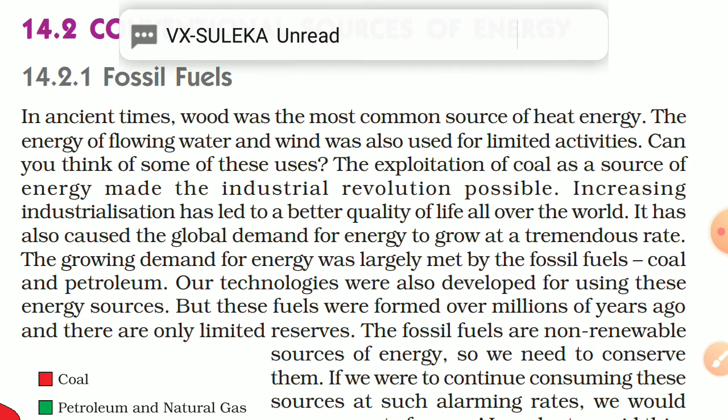It has also caused the global demand for energy to grow at a tremendous rate. Due to this increasing industrialization, people's life is becoming better. We are getting better things around us, and the growing demand for energy was largely met by the fossil fuels, coal and petroleum.

This growing demand, in earlier times, was largely completed by using coal and petroleum. Our technologies were also developed for using these energy sources, but these fuels were formed over millions of years ago.

There are only limited reserves. They take a very long time, like millions of years, to form, and we are using them at a great pace. If we compare the generation rate and the usage rate, the usage rate is much higher, so a time will come when there will be no fossil fuel left on the earth's surface.

The fossil fuels are non-renewable sources of energy, so we need to conserve them. If we continue consuming these sources at such alarming rates, we would soon run out of energy. In order to avoid this, alternate sources of energy were explored.

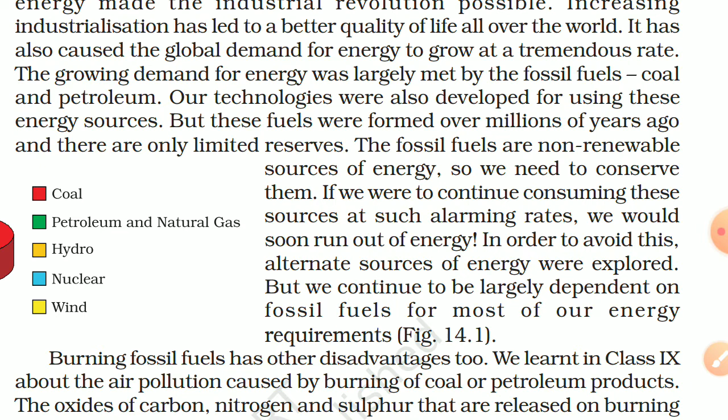Because these are very limited sources, in the near future, maybe by 2050, these fossil fuels will be completely over. At that time we will have to switch our energy demand to some renewable energy source. In order to avoid this, alternate sources of energy were explored, but we continue to be largely dependent on fossil fuels for most of our energy requirements till today.

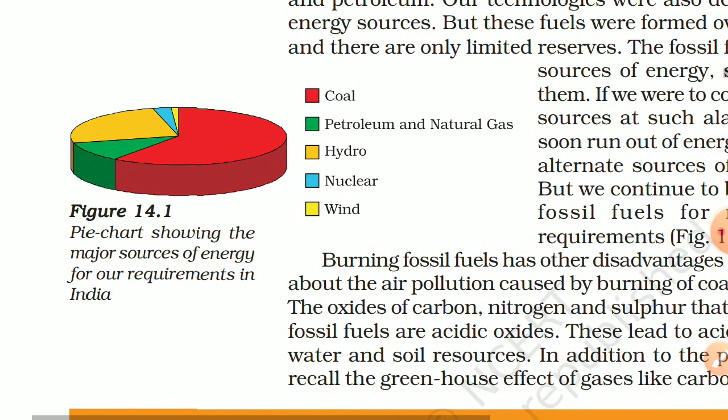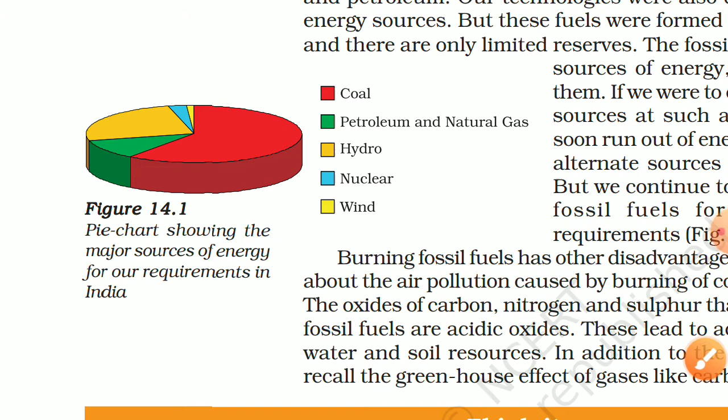As shown in this pie chart, coal is used the most, then green represents petroleum, yellow represents water energy, blue represents nuclear, and another yellow represents wind. Almost 60% of our present energy is fulfilled by coal and petroleum.

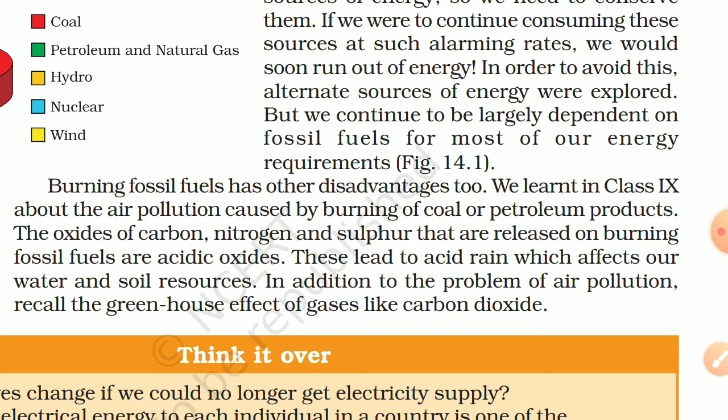Burning of fossil fuels has other disadvantages too. We learned in class 9th about the air pollution caused by burning coal or petroleum products. The oxides of carbon, nitrogen, and sulfur that are released on burning fossil fuels are acidic oxides, and these lead to acid rain which affects our water and soil resources.

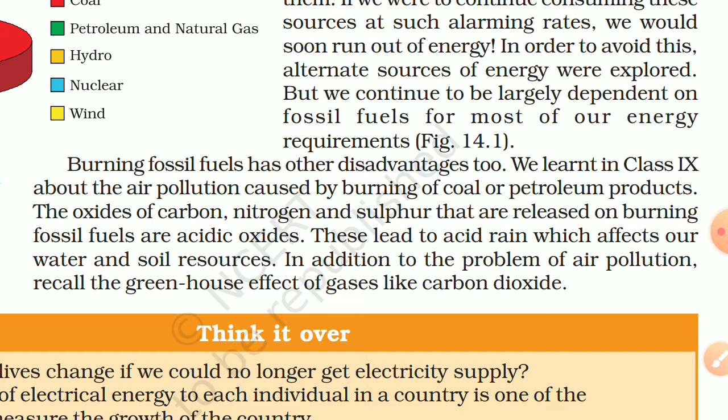In addition to air pollution, recall the greenhouse effect of gases like carbon dioxide. Coal mainly contains carbon, and when this carbon goes into the atmosphere it becomes carbon dioxide, nitrogen oxide, and sulfur oxide. These are very poisonous gases, forming acidic oxides, and ultimately causing acid rain, and they are also responsible for the greenhouse effect. The burning of fossil fuels is very harmful for our environment, and we are currently seeing its effect as air quality becomes degraded day by day.

The pollution caused by burning of fossil fuels can be somewhat reduced by increasing the efficiency of the combustion process and using various techniques to reduce the escape of harmful gases and ashes into the surroundings.

This fossil fuel emission can be reduced by research and by implementing new technologies by which we can emit very less quantity of these poisonous acidic gases. Also you can collect the harmful carbon dioxide gas which emits from your chimney. If you collect that gas and use it for other purposes, then its emission can be reduced.

Besides being used directly for various purposes in gas stoves and vehicles, do you know fossil fuels are the major fuels used for generating electricity? Yes, as you can see petrol and diesel you are using in your vehicles for transportation. But the electricity from which your air conditioner, refrigerator, television, tube light, fan, almost everything in your house runs, is generally made by burning fossil fuels.

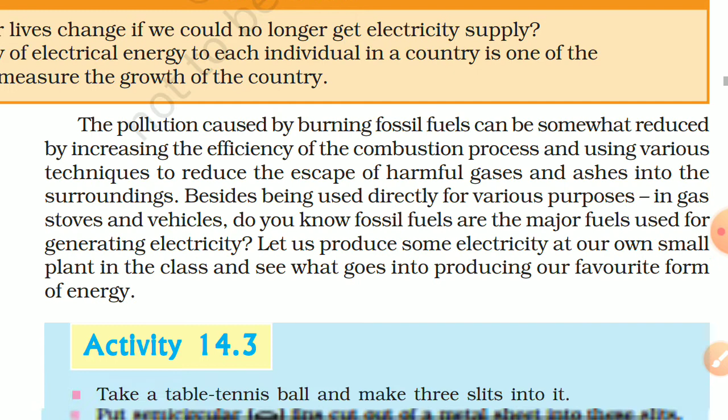So let us produce some electricity at our own small plant in the class and see what goes into producing our favorite form of energy. Let's do activity 14.3.

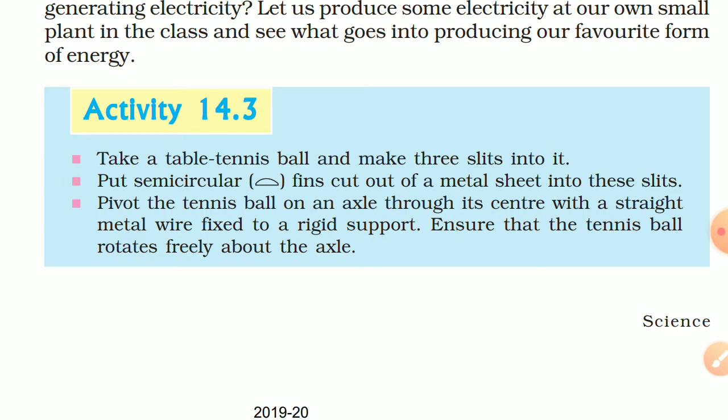Take a table tennis ball and make 3 slits into it. Put semicircular fins cut out of metal sheet into these slits. Pivot the tennis ball on an axle through its center with a straight metal wire fixed to a rigid support, ensuring the ball rotates freely about the axle. Now connect a cycle dynamo to this, and connect a bulb in series. Direct a jet of water or steam produced in a pressure cooker at the fins. What do you observe?

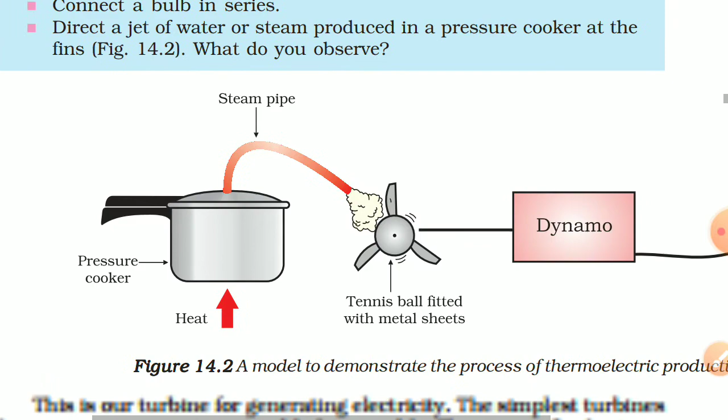In this activity I will show you how electricity is generated from fossil fuel. First of all, heat - how can we produce this heat? It is very important: coal. You have seen in villages that people burn coal to produce heat and energy, to cook food. So if you burn coal here, it will produce a large amount of heat.

This heat energy will transfer to this cooker. The cooker will create pressure. Due to this pressure, the pressurized steam will come and force this tennis ball to rotate freely. Due to the rotation, this dynamo will convert mechanical energy into electrical energy, and ultimately we will glow our bulb. So the main source of energy is this heat.

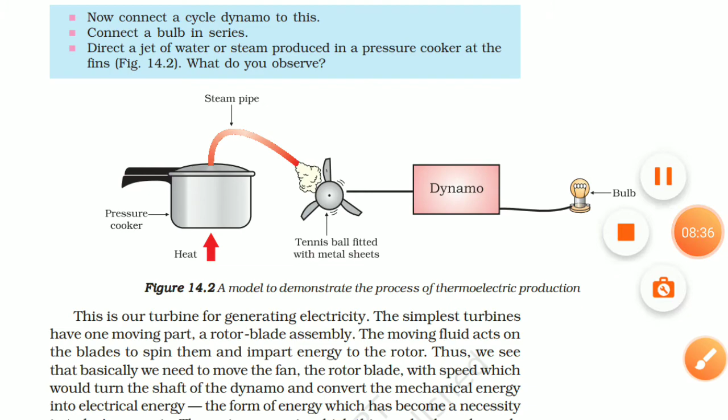And how is this heat produced? This heat is produced by using coal. Yes, so this is our turbine for generating electricity. The simplest turbines have one moving part, the rotor blade assembly. The moving fluid acts on the blades to spin them and impart energy to the rotor.

So to move this fluid you require some energy, some pressure. This pressure energy can be caused due to the burning of coal. Thus we see that basically we need to move the fan, the rotor blade, with speed which would turn the shaft of the dynamo and convert mechanical energy into electrical energy.

This form of energy has become necessary in today's scenario - electrical energy. Imagine if light goes out in your house for almost 5 to 10 minutes, then you become very frustrated. You can't live without electricity for even a few minutes nowadays.

So electrical energy is a very important form of energy, because all the appliances around us, even charging your phone or laptop for working, require electrical energy. So after charging, when your battery finishes, you have to charge your phone again. So for charging your phone you require electrical energy.

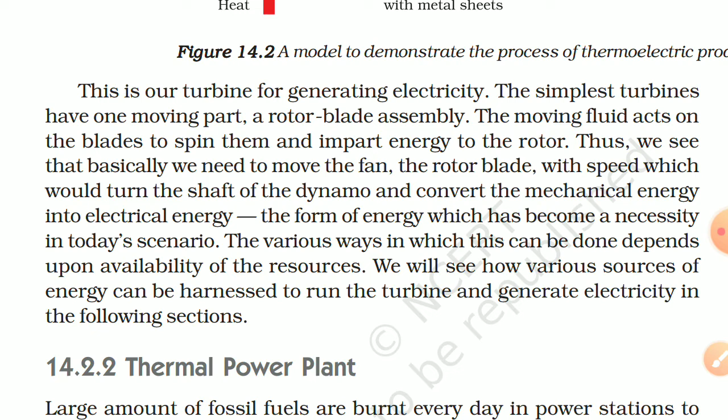This is a very important, in fact the most important, form of energy. The various ways in which this can be done depends upon availability of resources. We will see how various sources of energy can be harnessed to run the turbine and generate electricity in the following sections. Remember, the principle is to rotate this turbine. Imagine a wind power station, which has this type of fans - by rotating these fans you generate electricity.

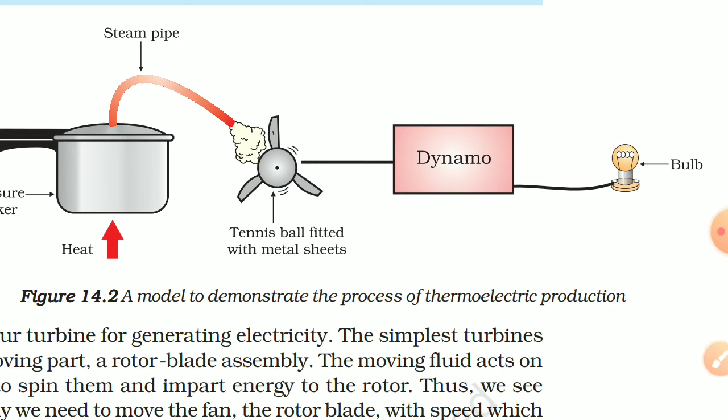So this rotation is very important, and you cannot rotate it physically. You have to require some pressurized energy to rotate it, and to generate that pressurized energy you require fossil fuels. In fact, for every type of energy, the main principle will be the same: the rotation of this turbine. So for that energy you take different types of energy.

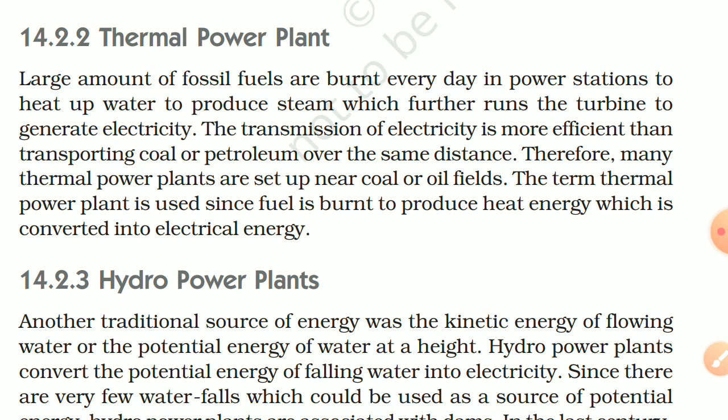First is fossil fuel, then I will discuss about thermal power plants. Large amounts of fossil fuels are burnt every day in power stations to heat up water to produce steam, which further runs the turbine to generate electricity. This steam, yes, ultimately we require this steam to rotate our turbine.

So how will we produce this steam? There are many different sources from which we can generate this steam, but after steam the path is similar. The transmission of electricity is more efficient than transporting coal or petroleum over the same distance. For example, if you find coal at Ankleshwar and have to transfer it to Ahmedabad, it is very difficult to transfer that coal directly. But if you convert it into electrical energy and transfer electricity, it will be very efficient and easy compared to transporting coal directly.

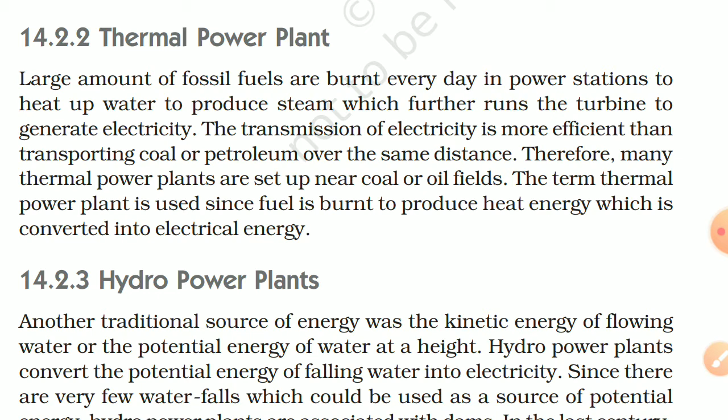Therefore, many thermal power plants are set up near coal or oil fields, so that after converting into electrical energy, we can easily transfer it to other places. But whole coal or whole oil is very dangerous and toxic to transport. The term thermal power plant is used since fuel is burned to produce heat energy, which is converted into electrical energy. So ultimately, either mechanical energy or heat energy is converted to electrical energy. Please remember this point.

Third is hydropower plants. Hydro means water. So by the pressure of water you rotate the turbine and generate electricity using a dynamo. This dynamo principle you will study in chapter 13, magnetic effect of electric current, where you will learn how the mechanical energy of rotation is converted into electrical energy. For now, just remember that it converts mechanical energy into electrical energy.

Another traditional source of energy was the kinetic energy of flowing water, or the potential energy of water at height. So imagine a dam. Many of you might have visited the Sardar Sarovar Dam, and if you have special permission to go to the downstream side, you will find 3 to 4 turbines placed inside the dam. Due to the pressure of the water force, those turbines run, and after their movement you can convert that into electrical energy.

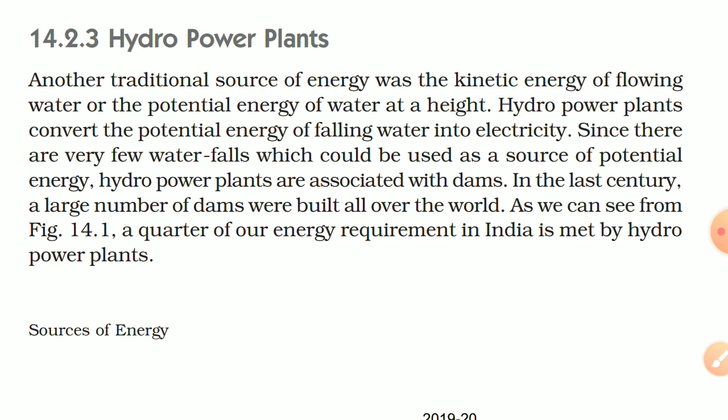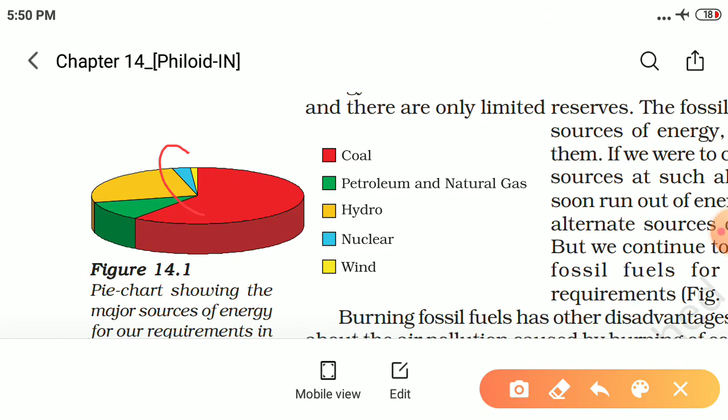Since there are very few waterfalls which could be used as a source of potential energy, hydropower plants are associated with dams. In the last century, a large number of dams were built all over the world. As we can see from figure 14.1, a quarter of our energy requirement in India is met by hydropower plants. In this pie chart you can see that a small amount of energy is produced by hydropower plants. Hydro means water.

So now we will study how we can convert water energy into electrical energy, or how we can rotate the turbine. This is the cross section of a dam, built everywhere, showing the layers. Here there is a reservoir, where water is stored. Here they make small gates, through which water flows and rotates this turbine.

So as this turbine rotates, it connects to the generator. This generator will convert the mechanical energy of the turbine's rotation into electrical energy, and ultimately this energy will be transferred by powerlines to different parts of our country. It may go to nearby cities or to different states also.

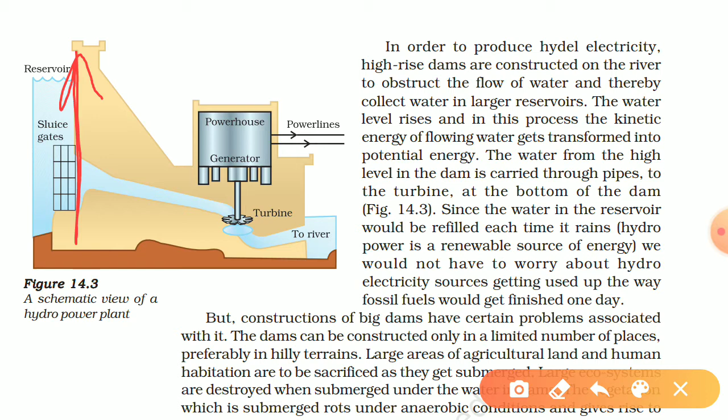Okay, it depends, and ultimately this water will again mix into the river. In order to produce hydel electricity, high-rise dams are constructed on a river to obstruct the flow of water. The flow will stop, and due to the slope, water will come to the turbine.

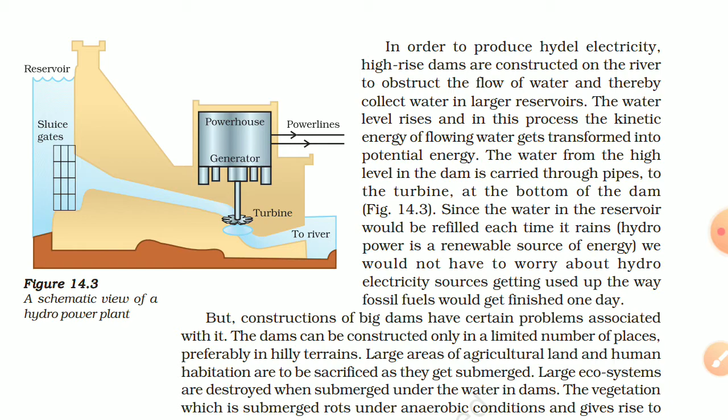In order to produce hydel electricity, high-rise dams are constructed on the river to obstruct the flow of water and thereby collect water in large reservoirs. The water level rises, and in this process the kinetic energy of flowing water gets transformed into potential energy. The water from the high level in the dam is carried through pipes to the turbine at the bottom of the dam.

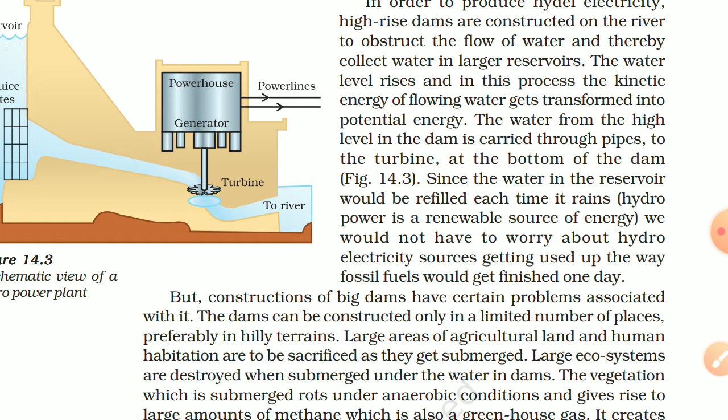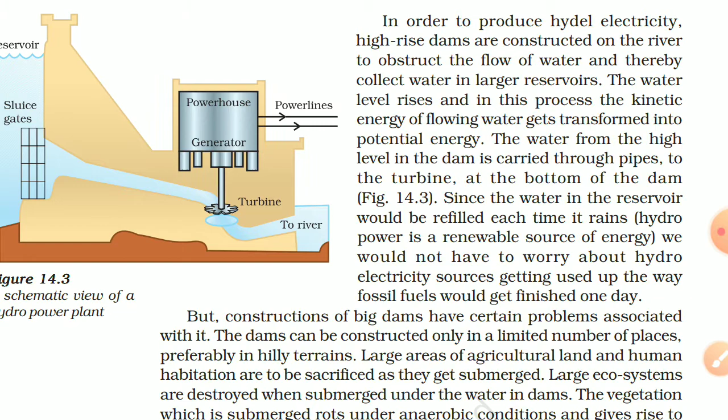Since the reservoir would be refilled each time it rains, we would not have to worry about hydroelectricity sources getting used up the way fossil fuels would get finished one day. If you can transfer the used water again back to the reservoir level, then your reservoir will fill up again. So this is not a finishable source, it is not a non-renewable source, it is a renewable source — you can get an infinite quantity of water, and due to rainfall also we will get more and more water.

But construction of big dams has certain problems associated with it. This is a disadvantage of constructing such dams. Dams can be constructed only in a limited number of places, preferably in hilly terrains. So you cannot construct a dam anywhere you want — there are certain limitations, certain places where you can construct this type of dam.

Large areas of agricultural land and human habitation are to be sacrificed as they get submerged. For instance, when the Sardar Sarovar Dam was constructed, many farmers opposed it because their agricultural land went into the reservoir area, so they had to sell their land. Many people opposed it at that time. Even any village that comes into the path of that water has to be shifted to a new site. So it is a very complex process to construct a dam because you have to take care of many factors.

Large ecosystems are destroyed when submerged under the water in dams — this includes aquatic life, many plants, and many aquatic animals that get submerged. The vegetation which is submerged rots under anaerobic conditions and gives rise to large amounts of methane, which is also a greenhouse gas. It also creates the problem of satisfactory rehabilitation of displaced people.

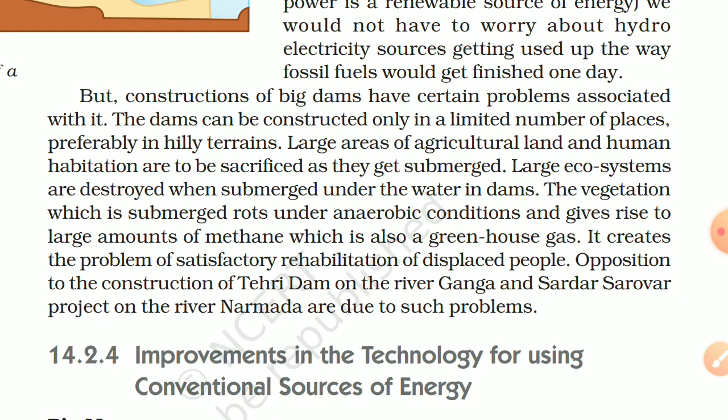So opposition to the construction of the Tehri Dam on the river Ganga and the Sardar Sarovar project on the river Narmada are due to such problems. These are some of the problems caused during the construction of dams. But once these dams are constructed, they are very useful for generating electrical energy.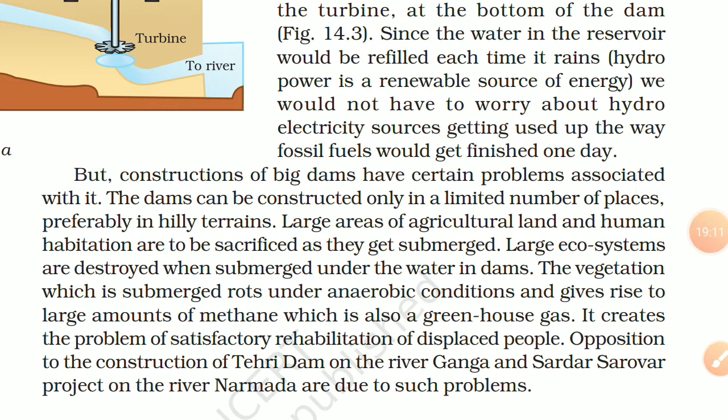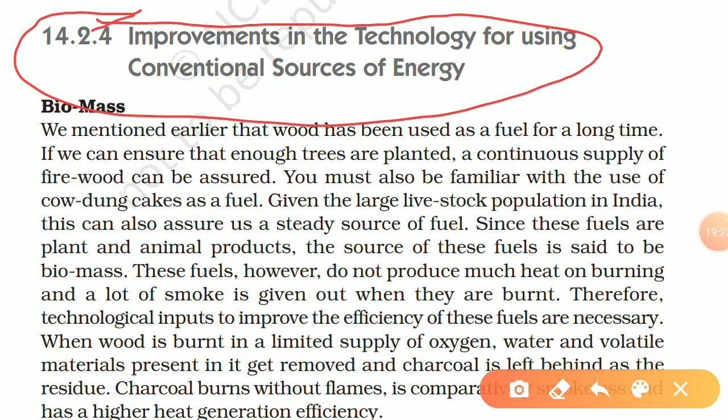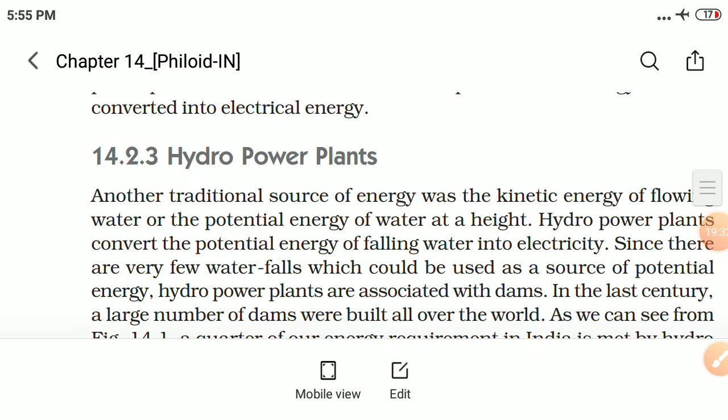I will stop this video here. In the next video we will discuss topic 4, which is improvement in technology using conventional sources of energy. Mainly, questions like explaining how hydro power plants work, how thermal power plants work, short notes on thermal power plants, or short notes on fossil fuels, and how you can generate energy from fossil fuels — these conventional sources of energy — can be asked from these topics.

They are very easy. So read it once, and if you have any doubt, then please ask me.